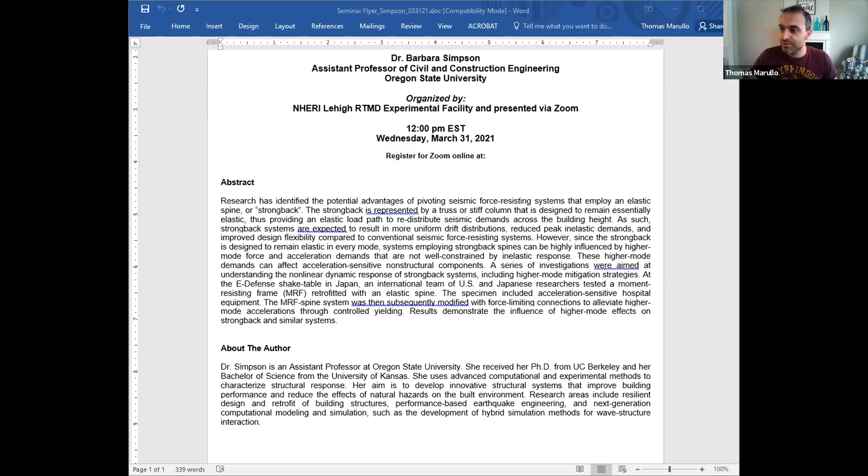Awesome, so thanks so much for the introduction. I'm going to be talking about a system that's rather near and dear to my heart, I've been working on it for quite some time. Today we're going to chat about higher mode force demands in systems employing elastic strongback spines. I tend to default to calling these systems with a strongback, but they're known by a number of different names depending on who you talk to. There's a lot of other researchers also looking into this topic.

But just to give a walkthrough—oh my, it is not moving, okay, I guess I have to click—to give a roadmap of what this presentation is going to go over: we're going to introduce this problem of story mechanism behavior in terms of brace frame systems, but this is an issue you see in a number of other systems as well, as we'll see throughout this presentation. Then we'll look at a possible solution, which is where this strongback concept comes in. I'm going to switch between calling it a strongback and calling it a spine, depending on which project I'm introducing.

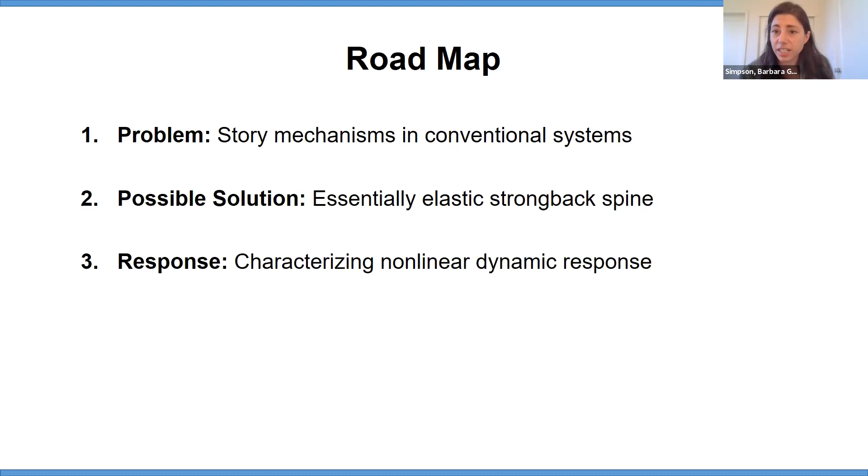Like I said, there's a lot of different research that's been looking into this topic. Then we'll go into characterizing the nonlinear and dynamic response of these systems, particularly in terms of higher mode effects. We'll talk about some ongoing research and applications of the system outside of how it was originally developed.

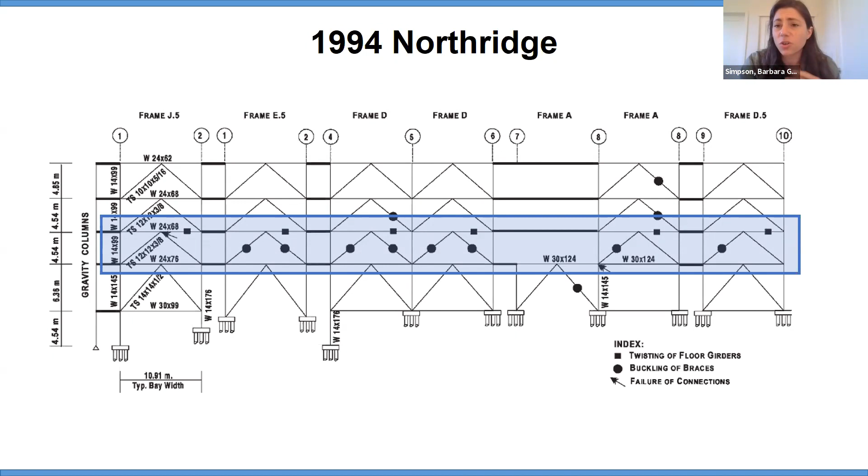And so let's look at this first part, this problem of story mechanism behavior. This is a building with observed damage after the 1994 Northridge earthquake, a very conventional brace frame system. All these dots represent some sort of inelastic response, in this case brace buckling mostly, as well as some connection failures. What you see is that almost all of these dots are concentrated in the second story. This is pretty indicative of what we're going to call story mechanism behavior, where you're utilizing the energy dissipation capacity of one story, but not leveraging the energy dissipation in all these other stories of this 5-story building.

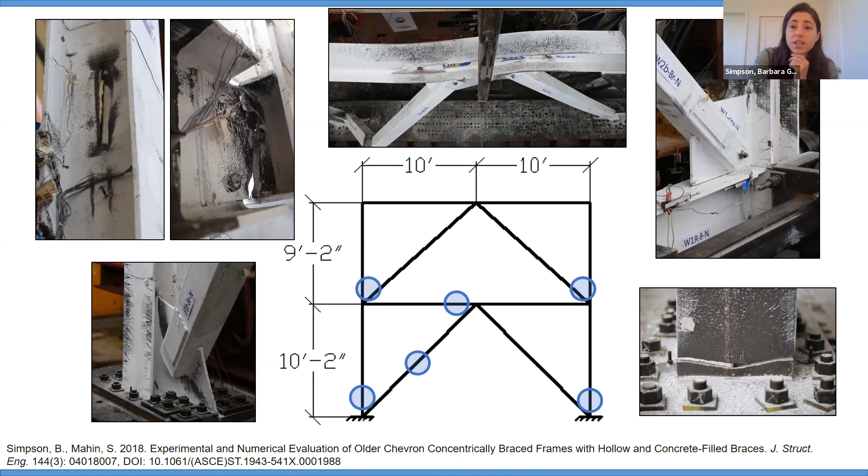This was the first test that we did, a 2-story conventional brace frame test. We saw a number of different damage states and types of deficiencies. But something I want to point out is that when we did this test, most of the damage was concentrated in the first story, fairly indicative of a first story mechanism.

In fact, we did two vintage brace frame tests. If the first specimen formed a weak first story, the second specimen, which was almost identical except we filled all the braces with concrete, gave us a weak beam mechanism where again almost all the damage was concentrated in the first story. This was the story mechanism behavior that was really the precursor to a lot of the work I'm going to present today.

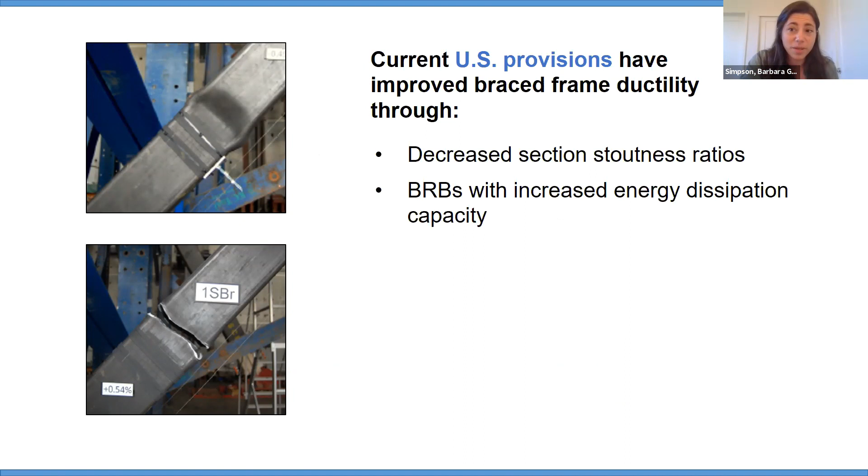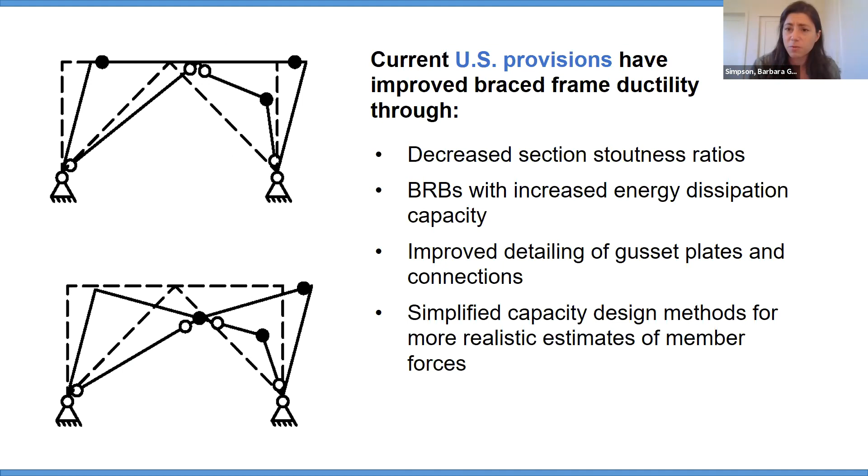If we take a step forward from vintage brace frame construction into modern US provisions for the seismic design of brace frames, we've done a lot. There's decreased section stoutness ratios to delay or prevent severe local buckling and fracture. We've introduced buckling restrained braces, which have more stable energy dissipation capacity compared to braces that buckle. We've improved the detailing of gusset plates to allow braces to buckle out of plane. We've also developed simplified capacity design procedures for more realistic estimates of member forces due to brace buckling and yielding. And yet there's still this issue that brace frames, as well as other modern systems, despite these improvements, still tend to form story mechanisms where damage is concentrated in one or a few stories.

That's where this possible solution comes in, this idea of an elastic strongback spine, which was really the brainchild of my advisor, Dr. Stephen Mahin, who actually passed away during the course of this research when I was doing my PhD. But he, as well as others, had recognized that there were a number of different ways we could mitigate this story mechanism behavior and mobilize the full energy dissipation capacity of the entire system.

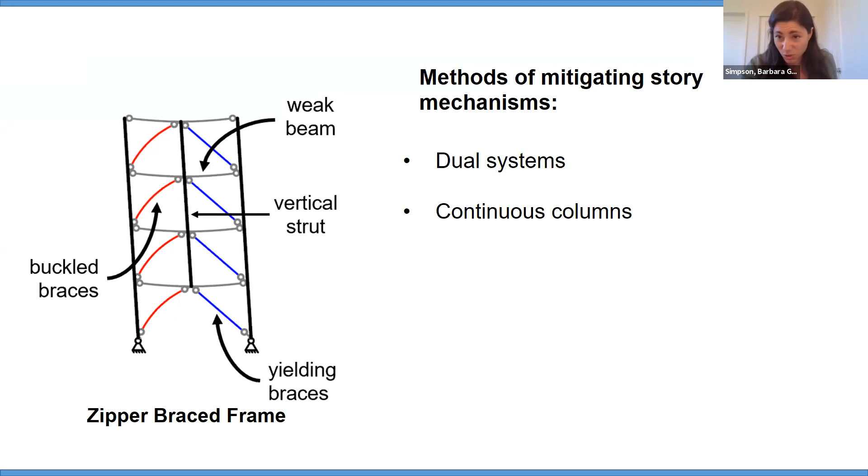If you look in the literature, there are a number of different ways people have approached this problem. There's dual systems, where you use a secondary system to apply some elastic restoring capability. There's the continuous column concept, where a continuous column spanning the height of a building, either some gravity system or something different, can span over the story mechanism problem. You could also think of steel plate or concrete shear walls as a stiff, elastic vertical element that imposes a more uniform drift distribution, thereby delaying these story mechanisms, along with rocking and self-centering systems.

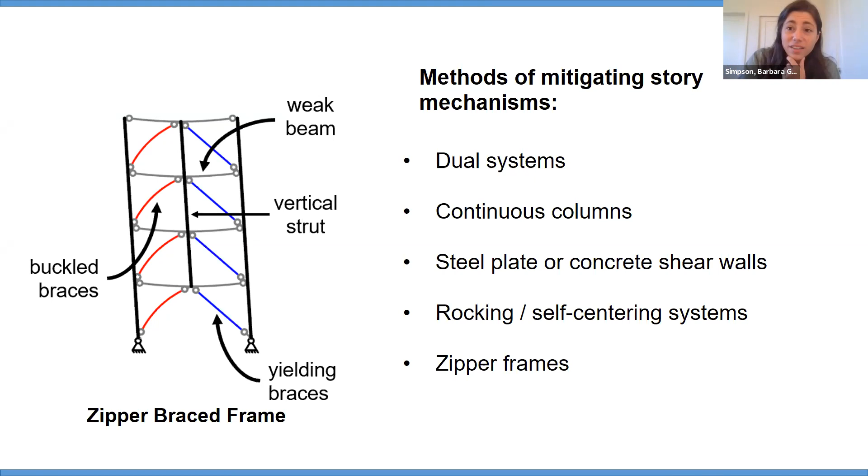The one on the right shows a precursor to what I've been calling the Strongback brace frame, but it's sort of a zipper frame, which leverages the idea of a weak beam and a vertical tie strut. As the braces yield and buckle, it pulls down on this vertical tie to engage adjacent stories. So those are different ways that researchers have approached this story mechanism problem.

It's useful when introducing the Strongback system to think about why story mechanisms form. So let's take a brace frame, and let's say each brace in every story has an equal strength or compression capacity C and an equal stiffness. These are the same braces used throughout the story, and it's subjected to some sort of seismic or inertial loading, let's say in this case an inverted triangular distribution.

When the braces in a story buckle, you get a loss of both strength and stiffness in that story. Unless there's an appropriate mechanism to distribute these demands from the columns, those demands tend to concentrate in a single story and potentially lead to a story mechanism behavior. That's the reason why these story mechanisms are so prevalent in these brace frame structures.

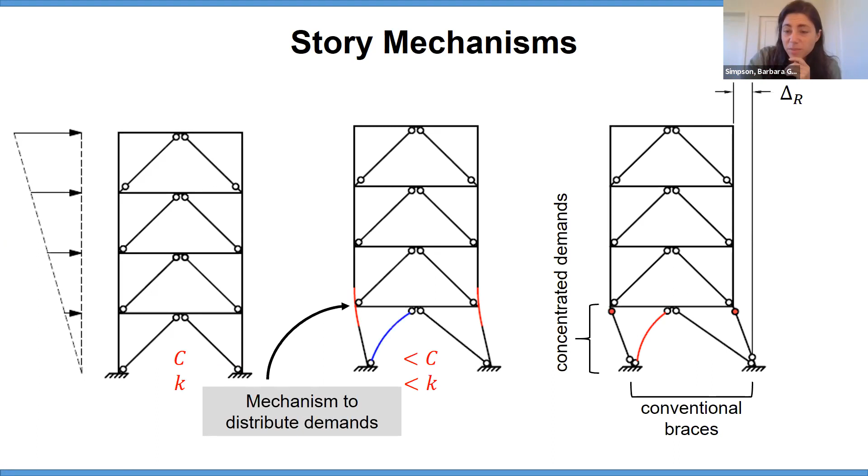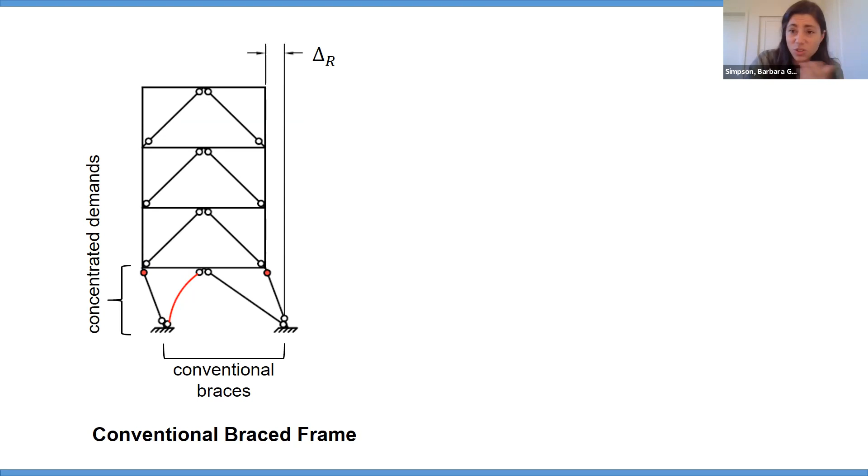This concept of a conventional brace frame has a tendency to form a story mechanism due to brace buckling behavior. The Strongback system introduces an essentially elastic mechanism that provides an elastic load path to distribute demands. This gray box area is a portion of the brace frame system that we design to remain essentially elastic, and it's able to distribute the demands across multiple stories.

So instead of, as shown in the figure on the left, 100% of the damage concentrated in one story, we utilize this elastic mechanism to distribute the demand across all 4 stories. Now you're getting a quarter of the damage distributed across this 4-story building. That's the concept of the Strongback brace frame.

Outside of that elastic Strongback, you design and detail the elements to yield and dissipate the seismic input energy. In this case, how the Strongback brace frame has been traditionally formulated is that you have primary fuses, which could either be yielding or brace buckling behavior, that serve as the primary energy dissipation mechanism. You also could have secondary fuses, for example flexural yielding in these longer beam lengths, that provide some secondary energy dissipation.

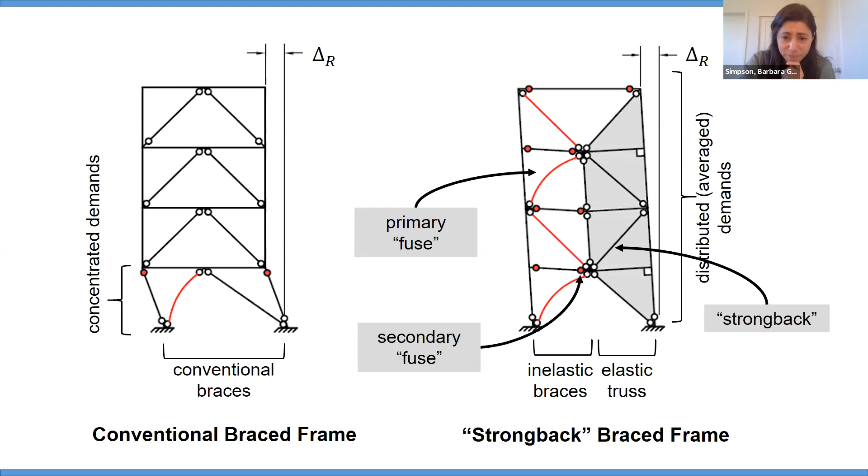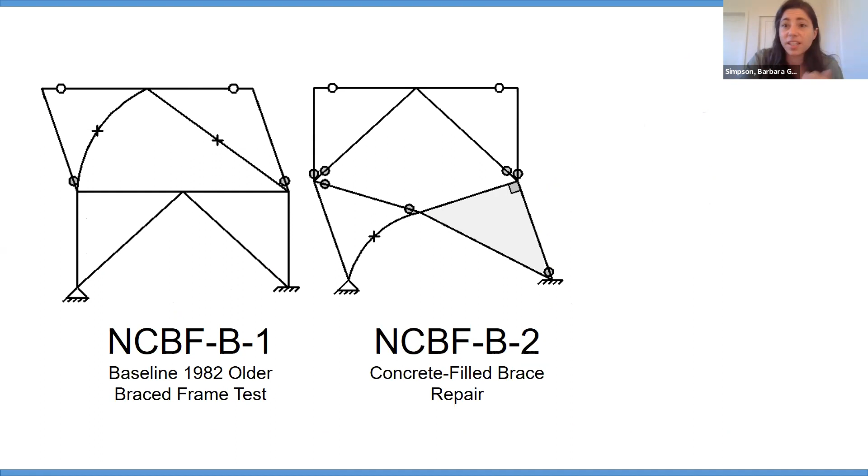Going back to this original research into these vintage brace frames, we had a first test that formed a second story mechanism, a second test that formed a first story mechanism, and then the idea of this third test as part of this research was to introduce the Strongback concept to distribute the demands over both stories. This gray triangle here is what we're envisioning as the Strongback retrofit scheme.

How the Strongback works, if we look at it in terms of its kinematics: this gray box, the Strongback, is designed to remain elastic. Initially it was formulated as a pivoting type motion, where this gray box pivots back and forth, and then you have some primary energy dissipation.

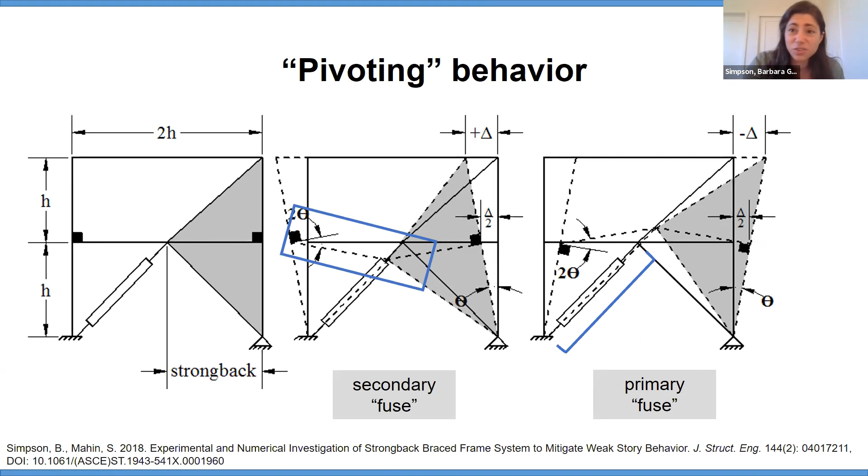In this experiment we were using a buckling restrained brace, a single buckling restrained brace. And because that pivoting motion induces a vertical deflection in the beam, you could also say there's a secondary fuse in terms of flexural yielding in this beam length.

We built and tested this at full scale. This figure on the right shows that pivoting motion, and you can see that we were successful in distributing the demands across both stories and achieving a more uniform drift distribution.

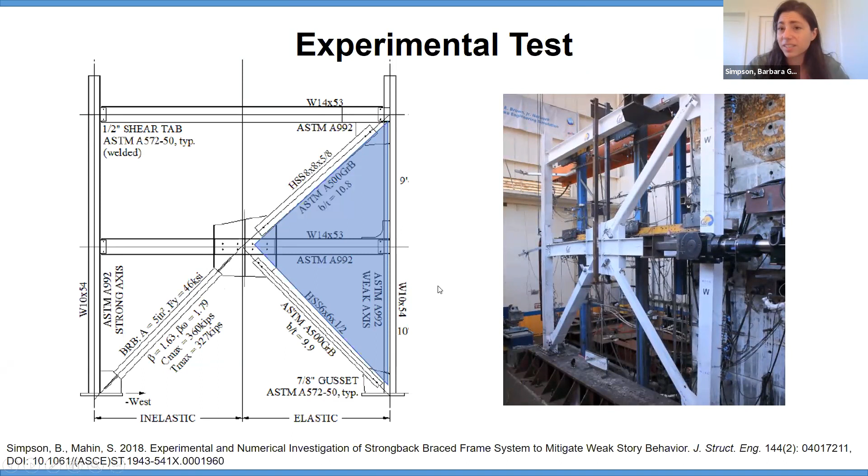So in that respect, this experiment was rather successful, and here we're seeing this Strongback, the elastic portion of this frame. This was a result of a number of different collaborations.

The vintage brace frame experiments were part of a much larger collaborative research program between Berkeley and the University of Washington. I happened to be the PhD student at Berkeley, and Andrew Sen was another PhD student at University of Washington. From this, there became interest in how we look at this system in terms of design development.

AISC also became interested in this project, and that leads into the second portion of the research: how do you characterize these force demands in the Strongback spine?

The reality is that the previous experimental test, although valuable in introducing the concept and showing that it was successful in distributing story drift demands more uniformly within the building, didn't actually look at the dynamic response. It was tested in a quasi-static way, with no inertial effects, etc.

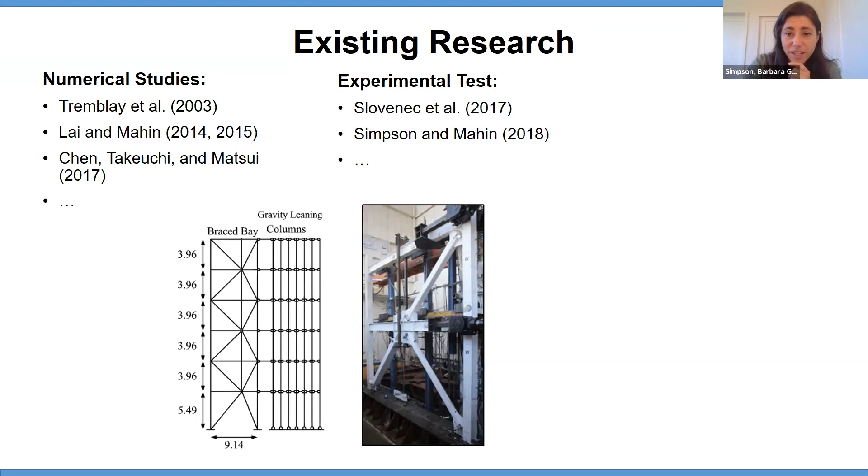There were some hybrid simulations conducted on a similar system, and then there was the experimental test I just introduced on this two-story Strongback system. Actually, at the same time, they were building and constructing very similar systems. This one's called the masted frame. You can see it looks very similar to many of the images I've shown so far.

By tipping structures in Berkeley, California. So we were having this sort of numerical analyses, experimental testing, and construction happening at the same time, but there were still large questions on how these systems behaved, not only in the inelastic range, but in terms of their dynamics. It turns out that when you look at the response of these systems, they behave quite a bit differently compared to traditional conventional systems designed to be ductile and exhibit inelastic behavior in every mode.

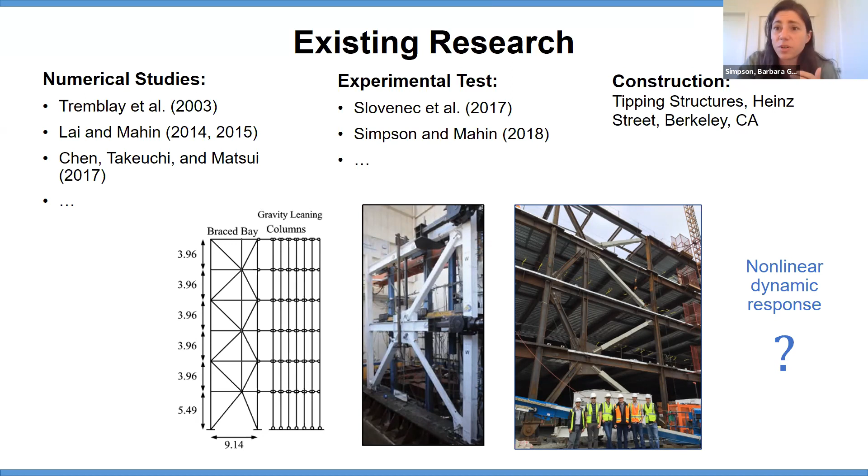So this was a major question for us, and I like to describe this in these sort of figures. I didn't develop these figures myself - they're from a seismic design course taught at UC Berkeley by Steve Mahin. I've leveraged some of these images in presenting this idea, but this is not a new concept of looking at force demands in the elastic components or the force controlled actions of a system.

Here, for example, we have a moment resisting frame where the plastic mechanism is typically flexural yielding at the ends of the beams, as well as potentially at the column bases. Here we have this moment frame subjected to an inverted triangular distribution. If we're interested in the moments in the columns, well, we know the flexural strength of these beams, so we can get the column moments.

However, during an earthquake, if those applied forces change, then the moments in the columns also will change. And as the inertial forces change again, those column moments also change again. So the elastic regions really may not be that well constrained by flexural yielding or the formation of these plastic hinges. What you could potentially do is run a number of different nonlinear dynamic analyses for a number of different ground motions, collect them statistically, get their median values, and then design for some statistical level of confidence for the moment in the columns to design them to remain elastic.

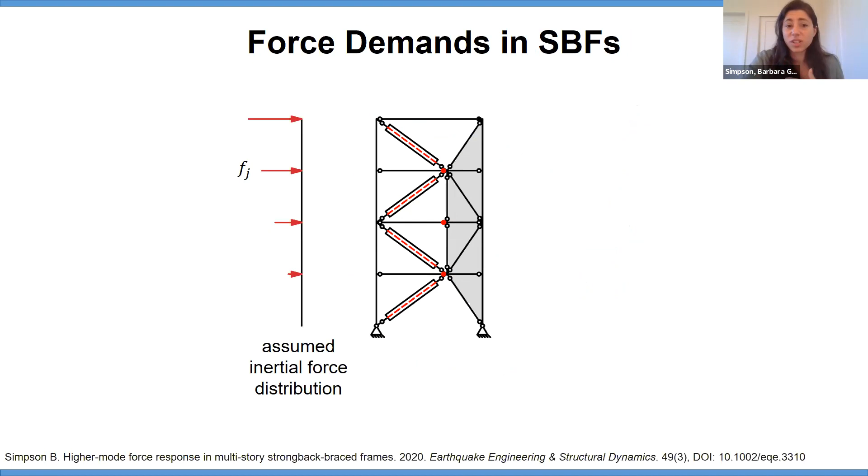So that's the example of force demands in a conventional system that we very much know. The same idea can be extended to this Strongback system. If you take this Strongback system, you can apply some assumed inertial force distribution. That's going to result in some sort of story shear demand. And then if we just do a section cut through this Strongback brace frame, what you'll see is...

The forces in this Strongback brace, denoted by PSJ, will be some combination of whatever the inertial forces are applying in terms of story shear and whatever forces are in the opposite brace - I call these typically nonlinear braces, the brace that's considered to be yielding in this case. So the force in the Strongback brace is coming from a combination of story shears developing during ground shaking from the inertial forces, as well as whatever axial force demand is being developed in the opposite brace.

Keeping that in mind, as that applied force distribution changes, the story shears will consequently also change. Even if that brace force is at its expected yield strength, if it's a BRB, the forces in the Strongback brace in this case will also change. And if those forces change again, those story shears would change again, and the forces in the Strongback brace change again.

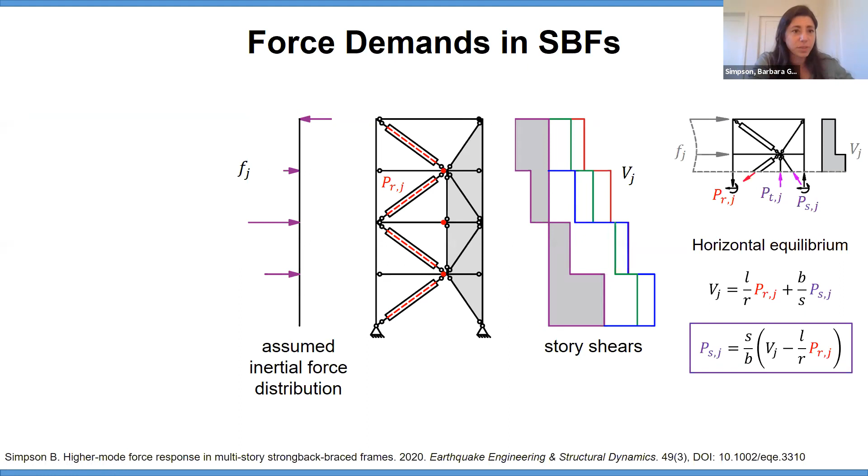What you end up seeing is that the force demands that are most significant, or could be most significant, in the Strongback portion of this system are actually ones that correspond to a force distribution where there's a reversal in the force. Here, there's a reversal of the force at the top story or top floor level, which is typical of, say, a second mode distribution. So you tend to see that the higher modes actually play a very dominant role in the forces in the Strongback.

Now, there's a number of different ways we can explain this. I prefer to take this approach from the concrete shear wall.

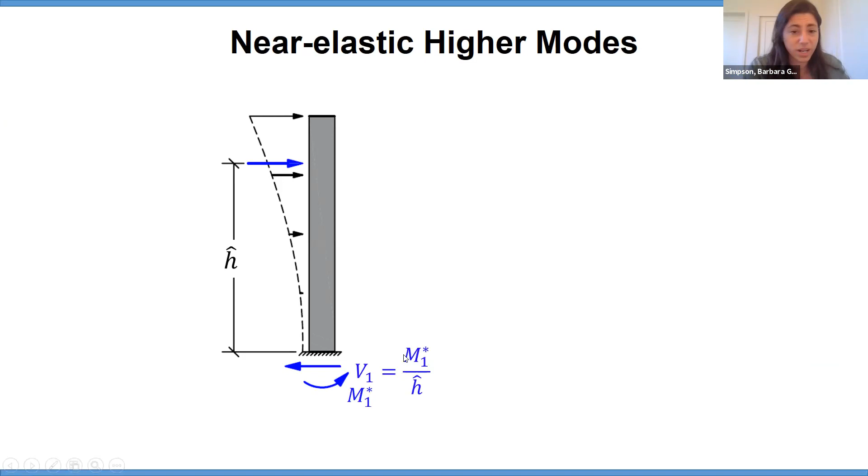So if we take a concrete shear wall that has some first mode-like inertial force distribution, and we have it form a plastic hinge about the base of the wall, with the remainder of the wall remaining elastic, the moments at the base of the wall are constrained by the strength of that flexural hinging at the base. The base shear would then be whatever that moment at the base of the wall is, divided by the height from the base to that force resultant.

Now, what you happen to see is that if that inertial force distribution changes, say due to contributions from the second or higher modes, then that force resultant will shift downward, because the second mode in particular tends to be associated with force reversal. Even if that moment at the base of the wall remains the same, because we're still getting flexural hinging at the base, that height to the force resultant becomes smaller, which means the base shear can become larger.

So even though the moments in this system at the base of the wall are well constrained by flexural yielding, the base shear, and even the story shears, are not so well constrained. Even the moments above the base are also not so well constrained. That's the same principle at work in the Strongback system.

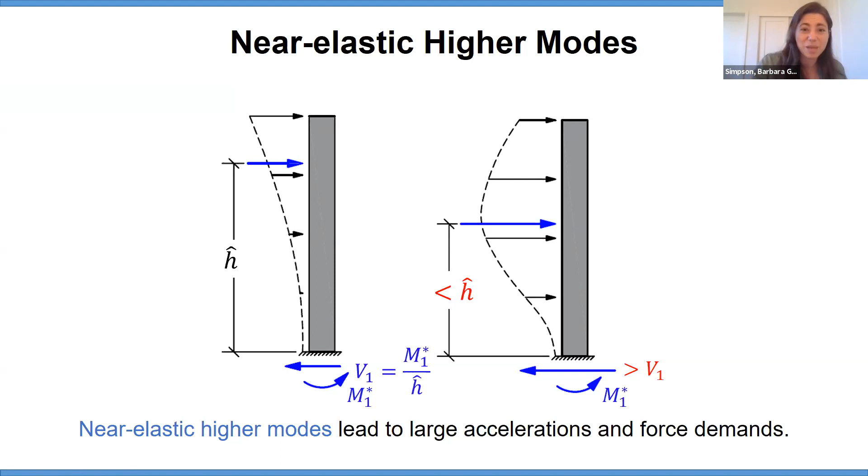In the first mode, you're getting limited forces due to the yielding mechanism. I introduced these previously as primary yielding in the braces, or secondary yielding in the beams. Those limit the forces in the first mode. However, that nonlinear mechanism is not necessarily limiting the forces in the second and higher modes.

So what you can see is, as you make this Strongback more and more stiff, you get this averaging of drift demands with story height. That tendency for a story mechanism to form, or for the system to concentrate damage and demands in a single story, will be reduced, and you'll get a more uniform drift distribution.

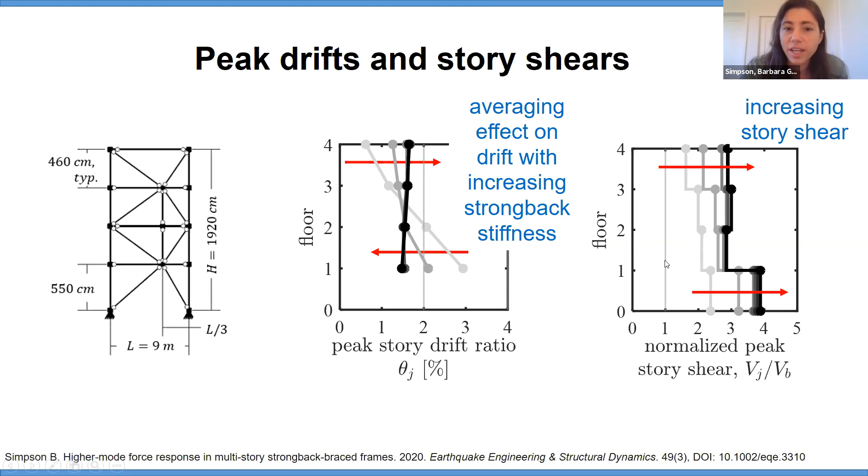But what you'll also get is increasing story shear and acceleration demands due to the presence of these higher modes. Those arise because the Strongback is designed to remain elastic in every mode, which is different from conventional systems where we expect inelastic response in all modes. So as that Strongback becomes stiffer, the story shear demands will also increase.

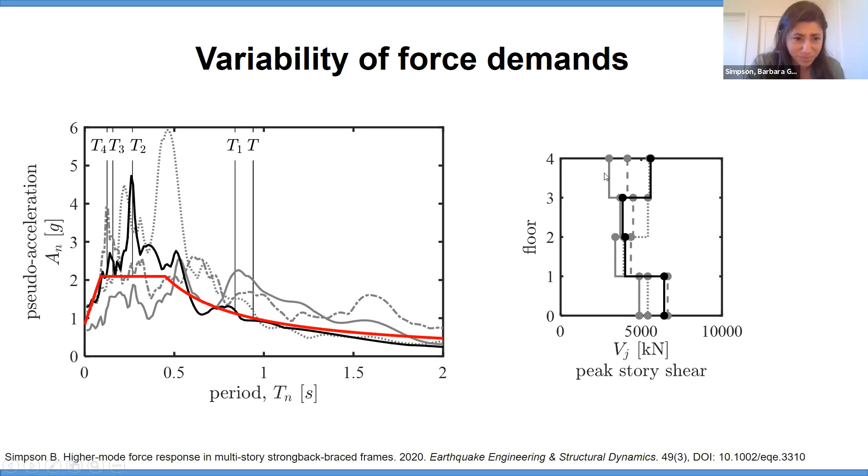They have fairly small pseudo accelerations or spectral accelerations at the higher mode periods of the Strongback system, so you're not seeing as much of this higher mode story shear response. However, if your ground motion happens to have very large spectral accelerations at the higher mode periods, those are going to stay in the elastic range and contribute more to the story shear and acceleration response. So there's a dependency of the force demands related to the characteristics of the ground motion and how it interacts with those higher modes.

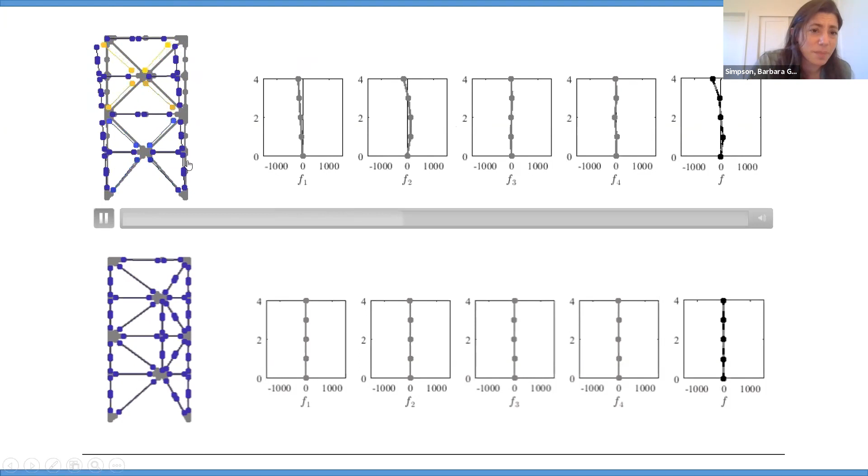Here's another example of a BRBF system, buckling restrained brace system, where the inertial forces are decomposed into the first mode, second mode, third mode, fourth mode, and the total response. This compares what you get with the conventional system versus these Strongback elastic spine systems. You'll see that the BRBs yield, giving primarily a first mode response, and the forces in the second and higher modes are still limited by the system's ability to form story mechanisms in those higher modes, so you're not getting large higher mode response in the system. It's primarily operating in that first mode response.

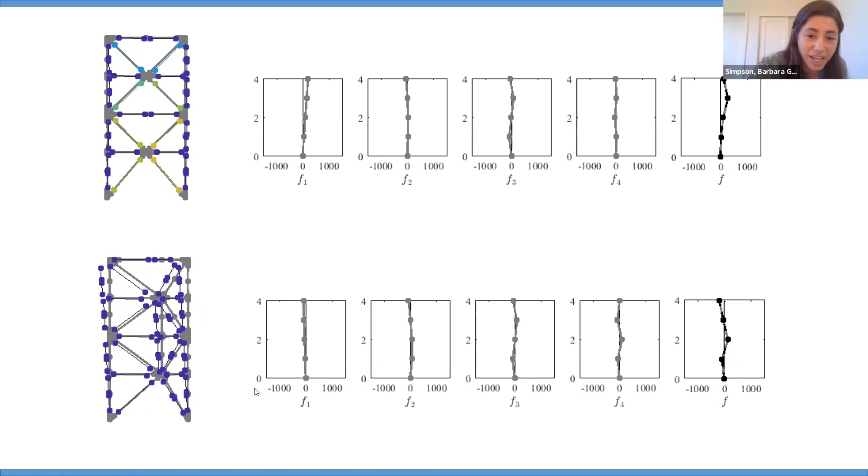What you end up seeing with the Strongback system in this figure on the bottom is that the BRBs, these nonlinear braces, these primary energy dissipaters, tend to yield under what looks like a first mode force distribution. But if you look at when the Strongback is really activated, shown by these colors, it's really when that second mode force distribution becomes dominant. If we replay this, you're seeing that Strongback light up, the force demands in that Strongback spine light up, really when you're getting very large second mode force contributions.

This is summarizing that: in the Strongback system, the BRBs are primarily engaged under that first mode type force distribution, but the Strongback, because it's elastic, is picking up very large second mode force distributions that it needs to be designed for in order to remain elastic in that second mode. So the inelastic portions of the system are subjected to that first mode pivoting response, but the Strongback needs to be designed for everything else, meaning it needs to remain elastic under the second and higher modes.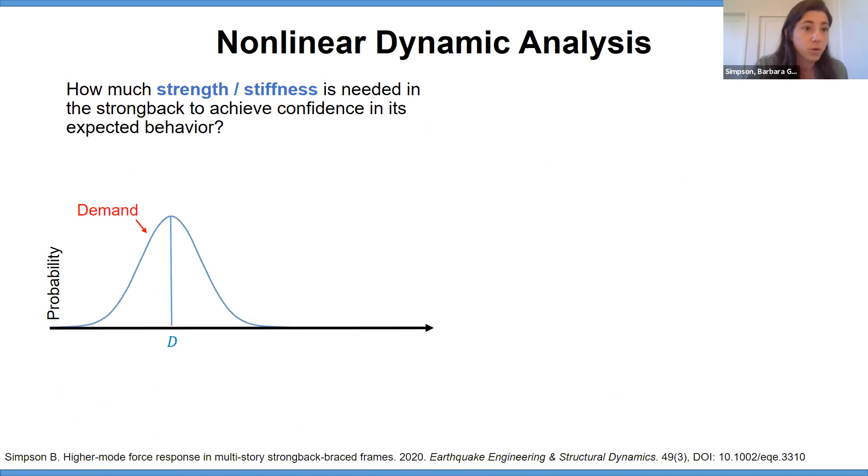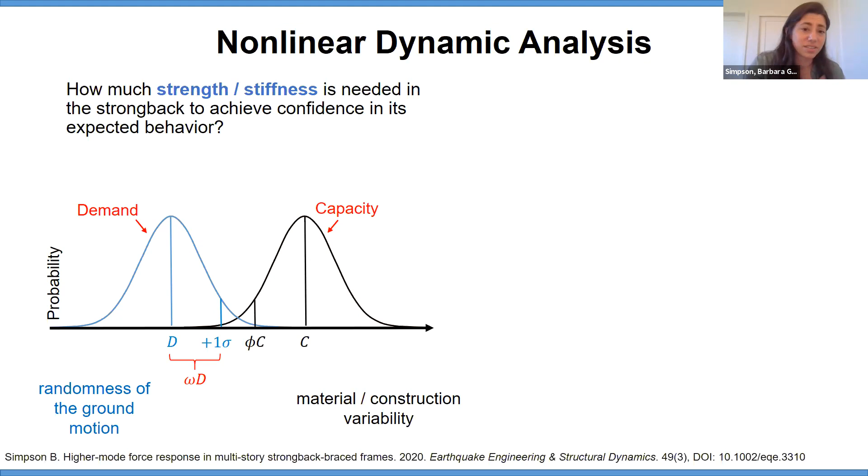So there are a number of different ways we can approach this problem, thinking about how to design the Strongback to have enough strength and stiffness. One way to incorporate these higher mode effects is through nonlinear dynamic analysis. You could run a number of different ground motion records, which will result in different force demands on the Strongback spine. Then, due to record variability, you take the median plus one standard deviation or some statistical confidence of that demand, and compare it to some capacity in the Strongback elements, accounting for material variability, construction quality, etc.

This allows us to make sure that demand is less than capacity, including variability in the ground motion record and associated force demands, as well as capacity in the Strongback braces. Then you could say we're just going to minimize the probability of having any inelastic response at some hazard level. That's one way to approach this problem. The issue is that a lot of the intuition can be lost in summary statistics, and this isn't necessarily a practice relevant to every design office. So there's been a lot of work looking at how to approach this in terms of static analysis, so you don't have to do an entire nonlinear dynamic analysis.

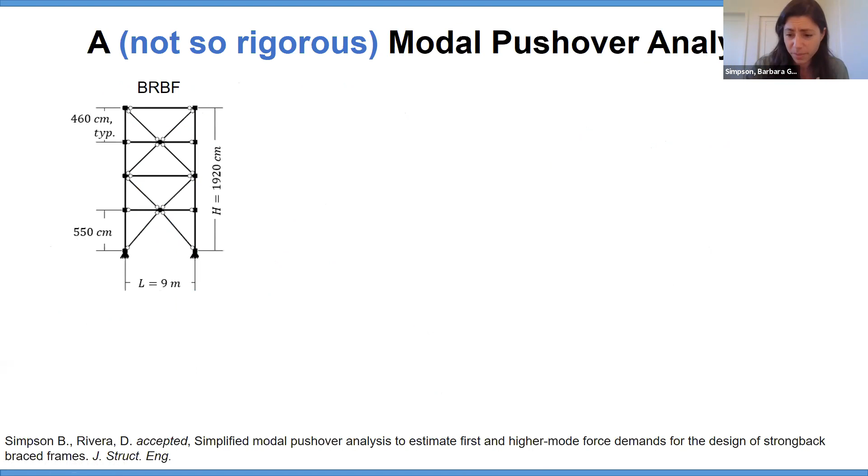Here's an example of a not-so-rigorous modal pushover analysis approach that describes the difference between BRBF behavior and Strongback behavior, to gain some intuition of the response. So you can imagine a typical BRBF.

If you do a pushover analysis in the first mode, then all the BRBs are going to yield. And you can see with this base shear versus roof drift ratio plot on the right, the forces after the BRBs yielded are limited.

And if you were to take that same BRBF and subject it to second mode response with a force reversal at the roof, what you'd see again is that the resistance of this system is primarily dependent on the BRBs, so those BRBs will yield again, and the base shear versus roof drift ratio response is again limited in the second mode. So this is that typical BRBF behavior.

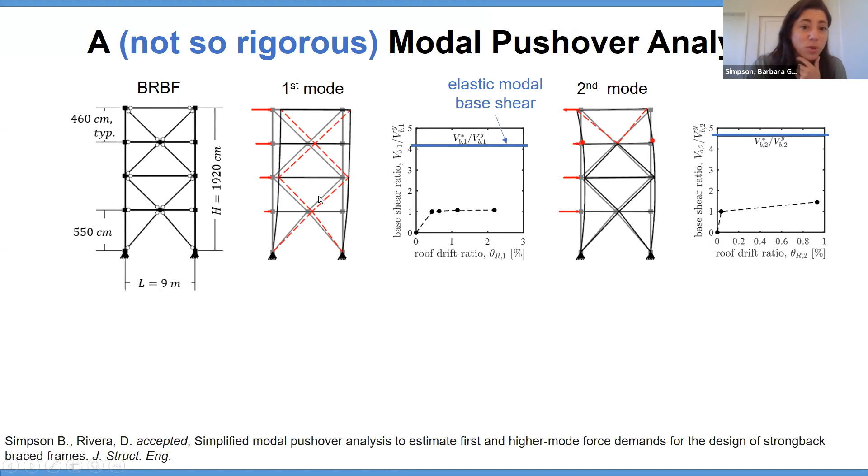If you look at the modal base shear in the first and second mode, if that system were to remain elastic, you'd see that the strength in both the first and second mode of a traditional BRBF system is significantly less than the elastic level base shear. So for this typical BRBF system, you have limited strength, or very small higher mode contributions in the second and higher modes.

But with the Strongback system, you'll see that same sort of response in the first mode—this pivoting-like first mode behavior. So you subject the Strongback to this first mode pivoting type response, and with the BRBs yielding and secondary flexural yielding in the beams, you still get a base shear response that's below the elastic base shear level. So the forces in that first mode are still limited by your nonlinear mechanism.

In the second mode, things get a bit more interesting. You can still get yielding in the BRBs in this case, but because of the presence of the Strongback, which is designed to remain elastic, you actually have very significant strength in what I'll call higher mode bending.

If you look at the base shear from the ground motion—say you take that ground motion, look at an elastic response spectrum, and say this is the base shear required for the system to remain elastic, that's this horizontal blue line here—you'd see that this system actually has significantly more strength than that blue line. So you need to design that Strongback to remain elastic above the elastic base shear level associated with whatever hazard you're looking at.

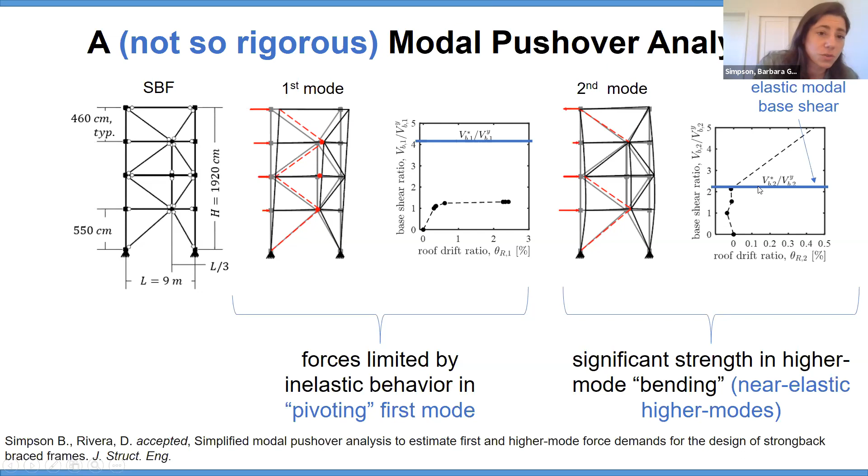One of the procedures that's been proposed: you can think about this first mode response as a plastic mechanism response, something that's yielded in the first mode where the forces are limited. So you can perform a pushover analysis or plastic analysis in that first mode. Then you can think about the second mode as this near-elastic or partial mechanism response, where there are additional force demands picked up through this higher mode bending.

You can think of other mode shapes—in this case a 4-story building, so 4 translational modes—as being near-elastic but with very small modal contributions. Here's the third mode and then the fourth mode, and then you can use modal pushover analysis to combine the response from each of these modes using some modal combination rule. In this case I'm showing SRSS, a superposition rule, where the higher mode contributions are superimposed upon this inelastic first mode.

I'd like to point out that there is a paper on this that has been accepted, but there are a number of theoretical inconsistencies with this sort of analysis approach.

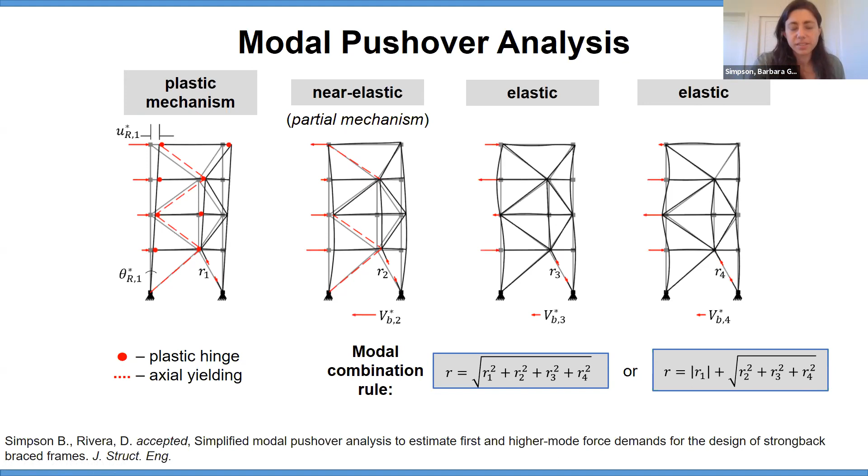For example, you're combining modal responses in the nonlinear range, which we know is not theoretically consistent. But what you'll end up seeing is that thinking about this inelastic first mode with a partial mechanism response in the second or even third mode, and then elastic response in the higher modes, actually gets you fairly close to what you end up seeing from the nonlinear dynamic analyses, despite its theoretical inconsistencies.

Another way of looking at this problem is through a modified response spectrum analysis. A number of different researchers have proposed methods for looking at other types of similar elastic systems, like concrete shear walls or rocking brace frames, in terms of a modal response spectrum analysis.

You can say that in the first mode, while you're achieving some inelastic response and limiting forces, maybe you can use an R=8 for a BRBF system in the first mode. But then in the second and higher modes, you see these near elastic higher mode force demands, so you could potentially use an R=1 in the higher modes. There's been a number of different analysis strategies where you modify the structural model to then do these analyses in the second and higher modes. I've just listed the work down below.

That brings me to this third part. I've introduced this idea of near elastic higher mode demands that are significantly different from what we think of with conventional seismic force resisting systems that yield in every mode, or form a mechanism in every mode, or can just form a story mechanism. What you see in the Strongback system is these very large higher mode demands that can be associated with an elastic response.

So when we start looking at applications and implementations, instead of describing the Strongback as inducing a pivoting type response with a more uniform drift distribution, I started thinking about the Strongback as more compensating for anything other than this pivoting first mode response.

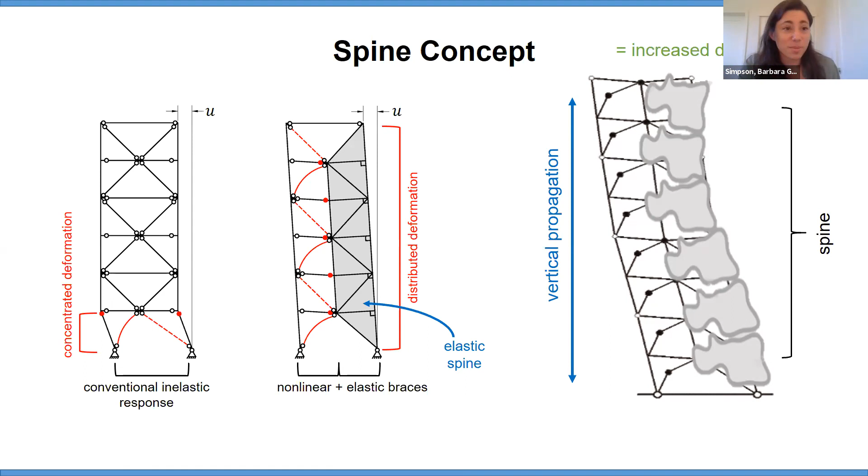So you can think of this Strongback more as a spine that propagates demands through bending in the higher modes, thereby providing some increased design flexibility. Rather than thinking of the Strongback as just this singular brace frame system, there was an effort to start extending it to other types of systems.

For example, in a concrete shear wall, you can have a wall that's pinned at its base that responds in much the same way, with much the same design premise, as a Strongback system. You can think of an uplifting rocking brace frame, which again has this very stiff elastic component, but uplifts about its base. So the overturning moment is controlled by this rocking mechanism, much like this pin base in the wall on the left.

Which is all related to this pivoting Strongback brace frame that you see on the right, where we have this gray box representing the Strongback, the elastic portion of the system, that then pivots back and forth about the pin base. So you can start saying that these near elastic higher mode demands are actually very similar across all of these systems, and that each of these actually belong to a family of, say, elastic spines.

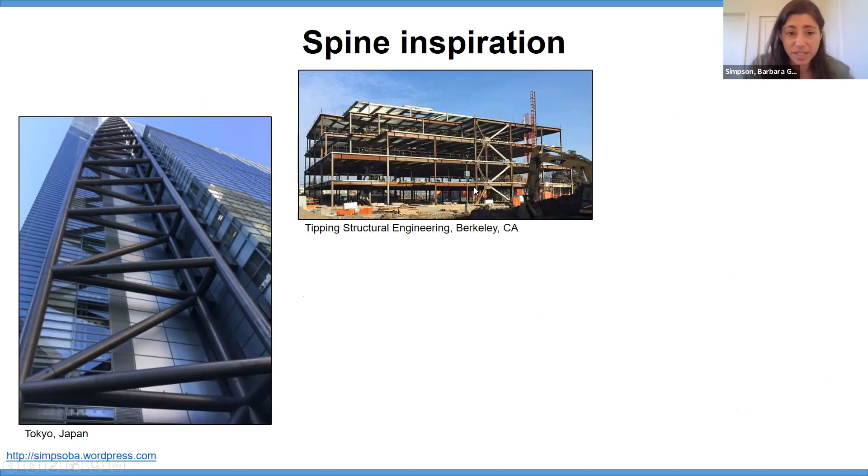There's a number of different examples of spine inspiration in practice. This is actually just a photo I took on my very ancient iPhone when I was in Japan a few years ago, where you could take an elastic exterior spinal system and think about it in terms of a tall building. I already mentioned the mast or Strongback concept that was implemented by Tipping in Berkeley. And then there's also the Tesla Gigafactory done by Gregory Luth and Associates with Exponent, in Reno, Nevada.

Something I like to point out with this last one is that they all have this ability to constrain moment about the base. So you're talking about a stiff elastic system that's pinned about the base of the Strongback or spine. It's not intended to provide supplemental lateral strength, it's more to engage the building more uniformly over the full building height.

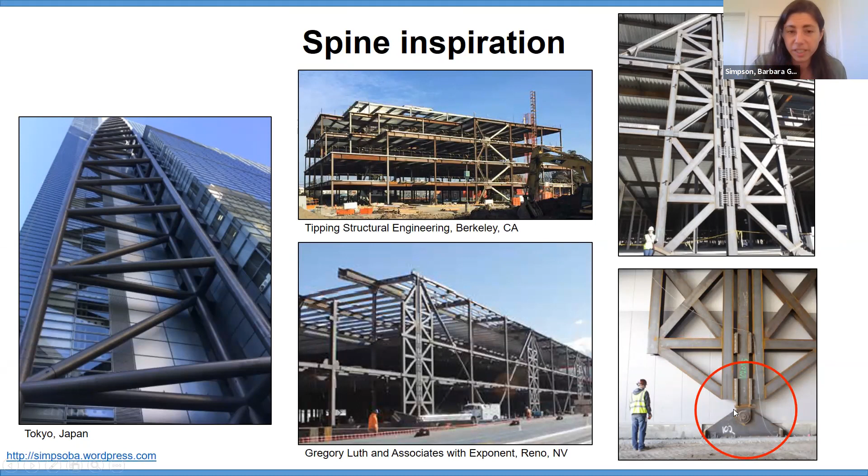There's been a number of these ideas of pinned base spines, for example, as a concrete shear wall.

And we can see this sort of connection at the base, this sort of very nice concrete machined pin. And then you can have some sort of shear yielding elements and then provide the energy dissipation. So these are all sort of in the family of these elastic spine systems.

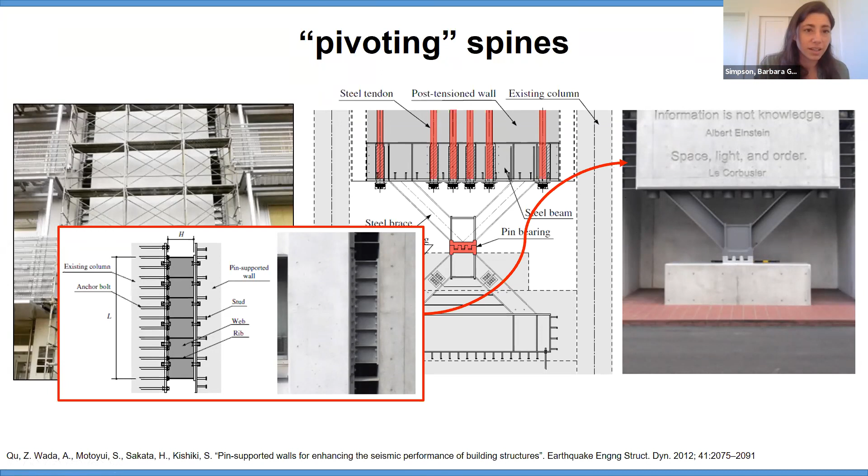And so that's where this new project comes in, and this is a collaborative project called the Frame Spine System with Force Limiting Connections. That's a collaborative project between Lehigh. I'm now at Oregon State University, and then the lead PI, Larry Fahnestock, is at University of Illinois. And then there's a number of Japanese collaborators that are also collaborating on this project.

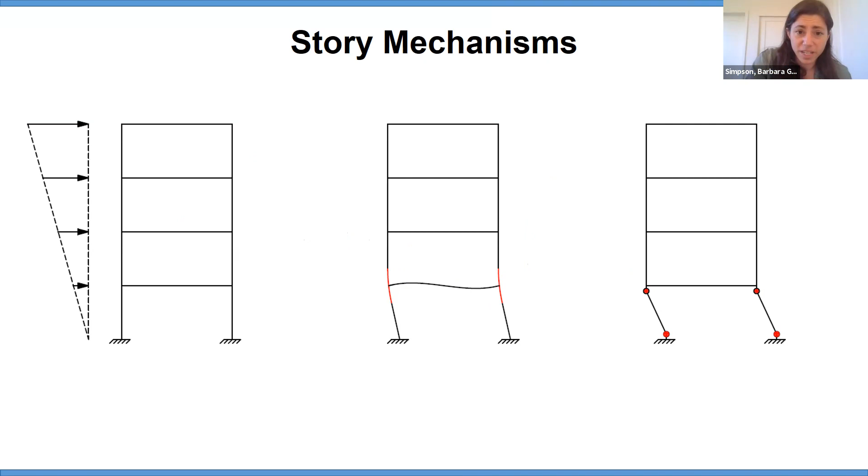And so we can sort of extend that idea of the Strongback system, which was initially developed for brace frames, into the concept of delaying or preventing a story mechanism response in a moment frame. And the same concepts still apply. You still need a mechanism to distribute demands. And often we think about that in terms of the strong column, weak beam design requirement to sort of limit concentrated demands in one or a single story.

And so you can imagine taking that moment resisting frame, we can now introduce an elastic vertical element to distribute those demands, which again is this sort of spine concept, that it's pinned at its base. It provides an elastic load path to distribute demands uniformly, and then is also designed to remain essentially elastic. And so you have this spine that can distribute demands more uniformly with building height, but then you also still have this higher mode effects that tend to come into play.

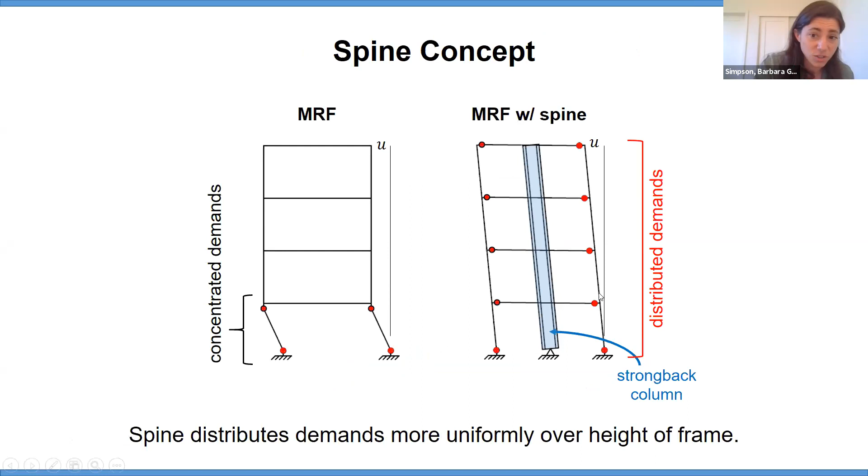And I'm just going to show the same slide that I showed previously. And so you have the effects of the higher modes that are not well constrained by the nonlinear mechanism. So even though you have yielding, in this case, in the base MRF due to flexural yielding at the end of the beam, you still have these higher mode effects that are not well constrained by that base MRF yield mechanism, that side-sway mechanism.

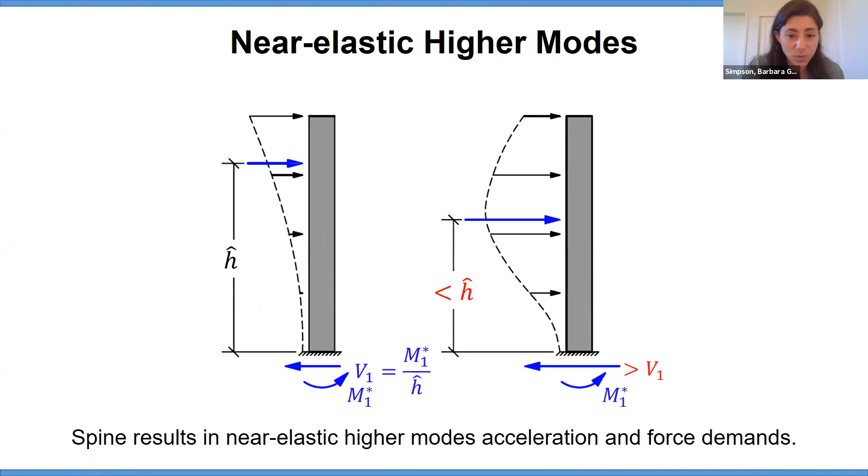And so to mitigate these sort of higher mode demands, a lot of work was done at Lehigh to develop a force limiting connection. And a force limiting connection is a yielded connection that's sandwiched between, in this case, the base moment resisting frame, but it's really any conventional system, and then an elastic strongback spine.

And so you use this yielding component that limits the transfer of force demands from the elastic spine to the base system, in this case an MRF. And because it limits that transfer of forces, it can then reduce the acceleration and the force demands that we're seeing from these very significant higher mode effects, these near elastic higher mode effects.

And then there were a number of other force limiting connections that were also developed by Lehigh. In this case, we can see a tongue FLC, which again is this sort of yielding mechanism between the spine and the MRF that's designed to reduce these acceleration and force demands.

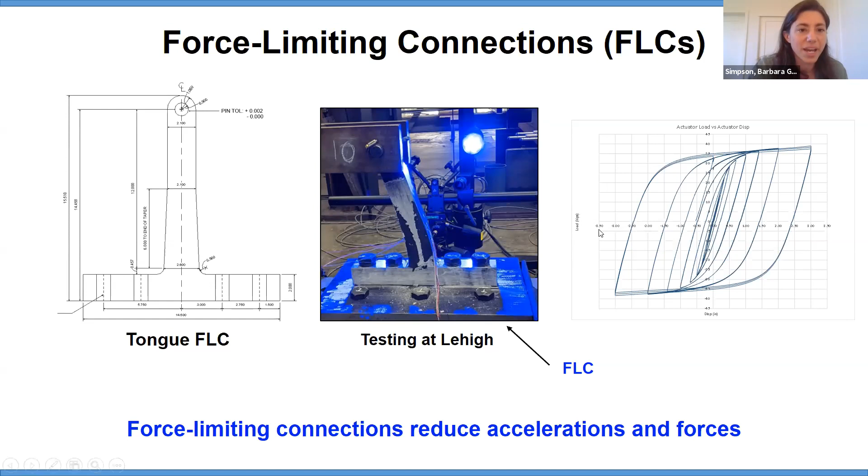And so now we can say, well, we can have a spine that's designed to remain elastic, to induce more uniform drifts, but we can also control our accelerations by having a yielding component between that spine, that strongback system, and the base frame. And so...

As part of this study, we sought to test this hybrid spine force limiting connection, or FLC, idea. And so we actually were able to leverage an existing shake table study being conducted by the Japanese at the E-Defense shake table. So the original study was testing a 4-story moment resisting frame that was connected through this walkway to a 3-story base isolated building.

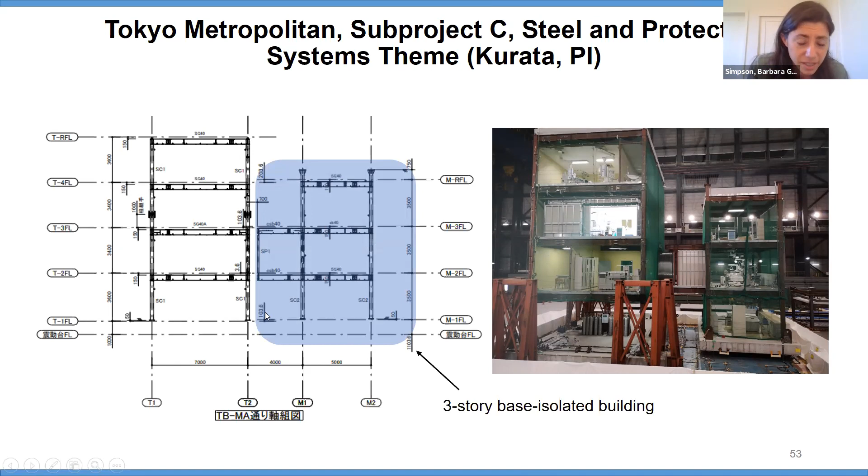And both structures had non-structural hospital equipment that were acceleration sensitive. So then we could look at the impact of having the higher mode accelerations. And so what we did in the study is we made use of this existing 3-story base isolated building, and we locked the isolators, and then we retrofitted it with our spine force limiting connection idea.

And so if this was the original 3-story building with base isolators, we added a 4th story to better look at these higher mode effects.

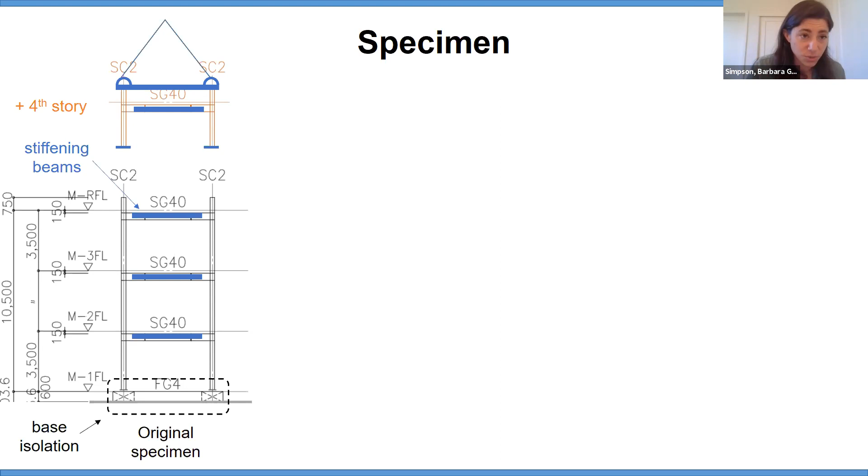We also added stiffening beams that allowed us to connect the spine to the MRF and distribute those demands a little bit better.

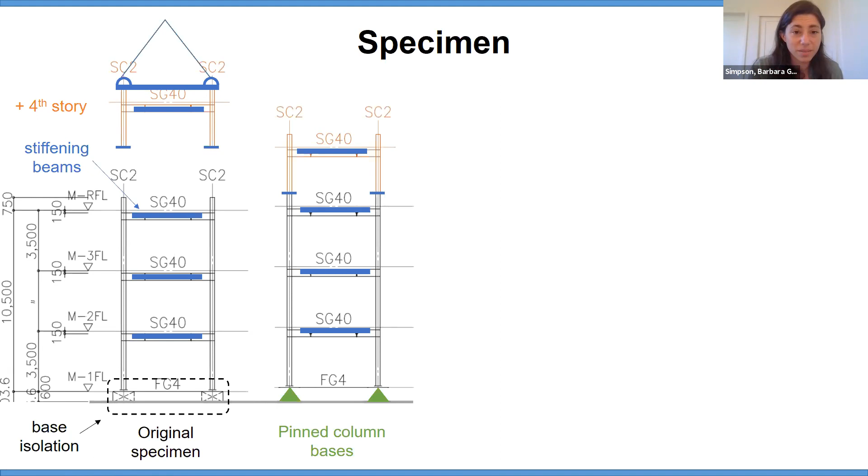We also pinned the column bases in the base MRF to really induce a severe story mechanism, because we wanted to look at a system with large higher mode effects and a severe story mechanism tendency. The higher mode effects are due to the inclusion of an elastic column in this case, the strongback spine that was connected at all 4 floor levels to the base MRF.

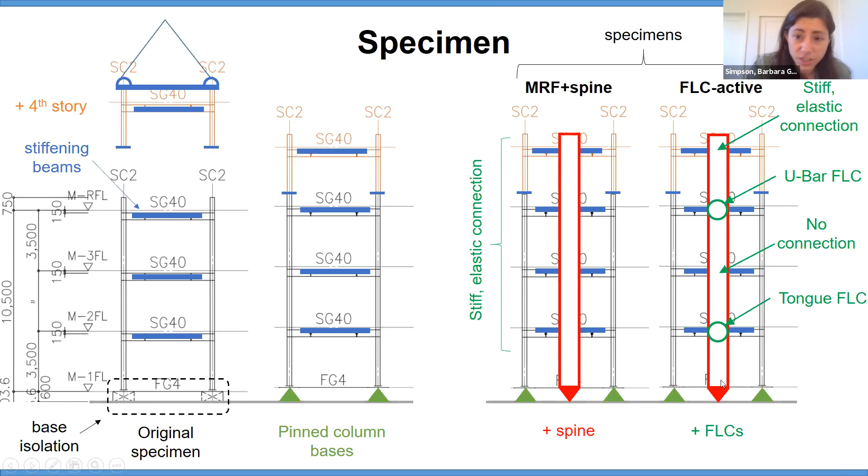That's going to induce the higher mode force demands. We're also going to add a second case where we have force limiting connections between the spine and the base MRF, using those U-bar FLCs developed by Nippon and the tongue FLCs developed at Lehigh. Between these two specimens, there's the spine plus base MRF where the FLCs were locked and not engaged, which you can think of as a very stiff connection between the spine and the base moment resisting frame, and then the FLC active case, where we had deformable yielding connections to mitigate higher mode acceleration demands between the spine and the base MRF.

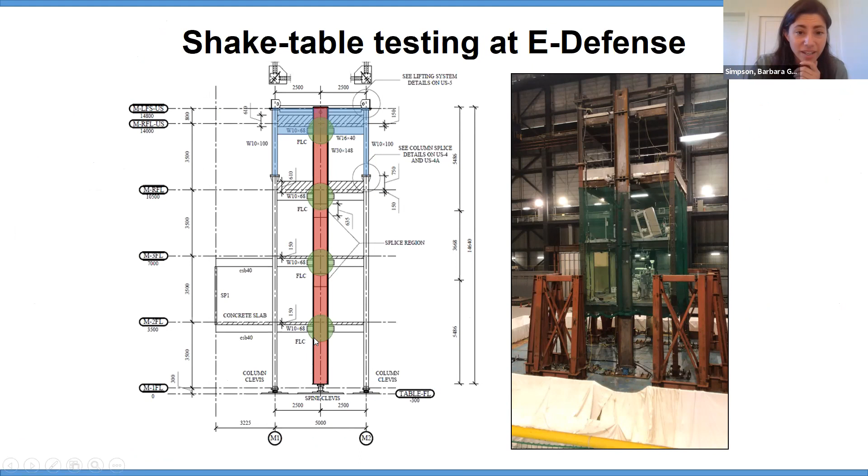This was the progression from concept to actual testing, an experiment that we completed in December of last year. You can see the spine, the stiff, strong, elastic strongback spine, with the potential FLC locations and the additional fourth story.

In preparation for this testing, we looked at a number of different ground motions. This is a suite of over 80 ground motions for a 10% probability of exceedance in 50 years hazard level, for a site in Oakland, California, consistent with the original moment resisting frame.

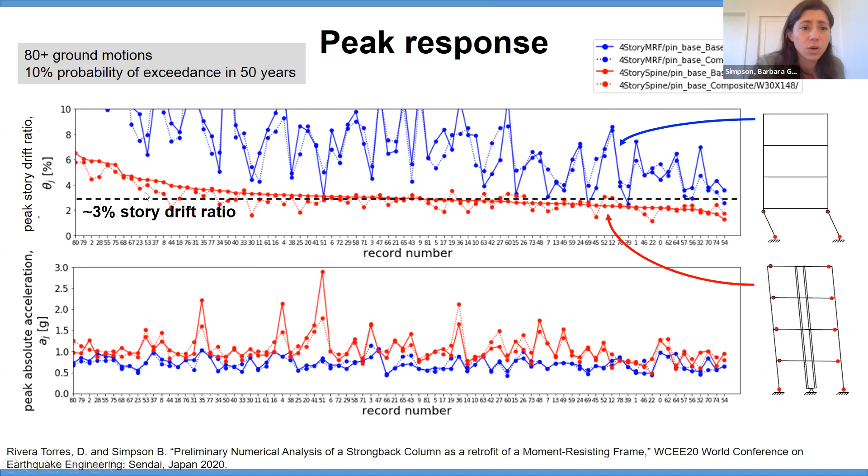We selected a ground motion to achieve not huge story drifts, because we wanted to be safe during the shake table testing, so a story drift ratio less than 3%. We were also very interested in accelerations associated with non-structural damage, because these structures originally had hospital equipment, so we wanted to induce rather large higher mode acceleration demands, around 2G.

We ended up selecting ground motion 48, which corresponded to a Northridge ground motion record that gave us reasonable drifts, so we were pretty safe, but also so we could observe these very large higher mode contributions coming from the fact that we've implemented this spine.

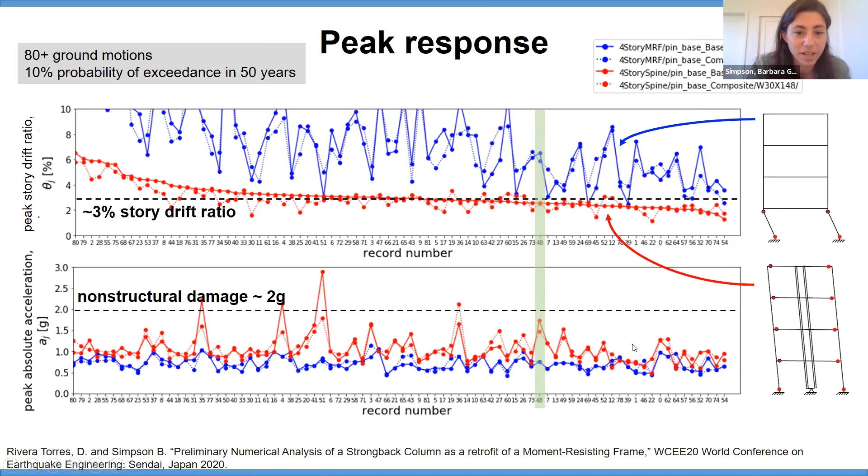Notice that this blue line is associated with the base MRF, which has a severe story mechanism tendency, and that story mechanism is limiting the acceleration response. But when you add the spine, you can really pick up those higher mode accelerations, as seen in these red plots on the bottom plot here. So we selected that first ground motion to look at this higher mode response.

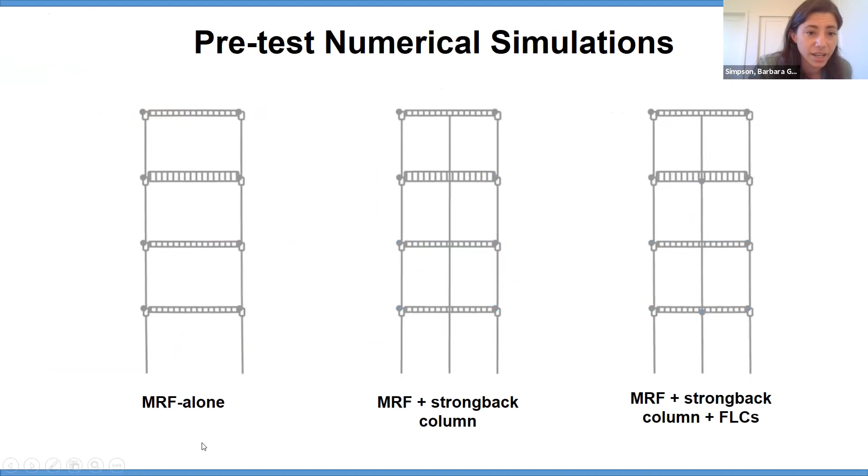This is an example of the pre-test numerical simulations of the MRF by itself, the MRF with the addition of the Strongback column, and then the MRF with the Strongback and these force limiting connections. With the MRF alone, you get a really severe first story mechanism tendency, shown in this figure on the left. This is pretty much beyond the range of the numerical model at this point, but associated with collapse in the structural model.

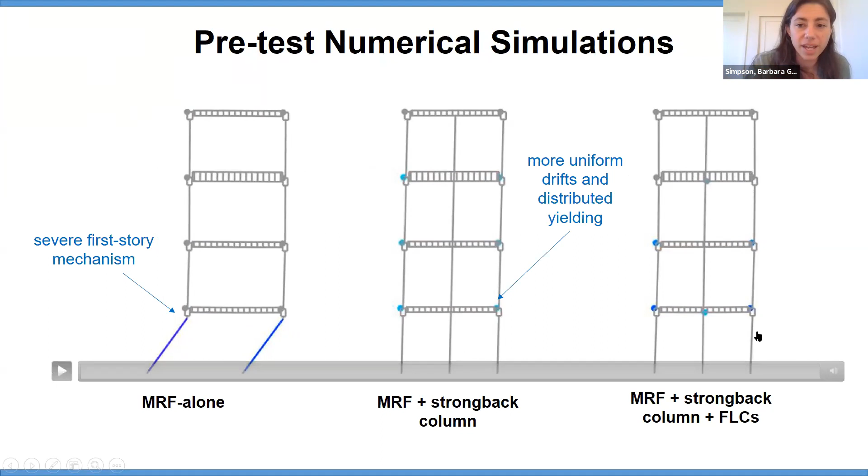With the spine, you get a much more uniform drift distribution across the building height. So the peak drift demands are decreased, but you're also seeing damage occurring in every story. You see something similar here, still a uniform drift distribution, slightly larger peak drift demands, but also yielding at these FLC locations, which allows us to mitigate some of the higher mode acceleration effects that can affect sensitive non-structural components.

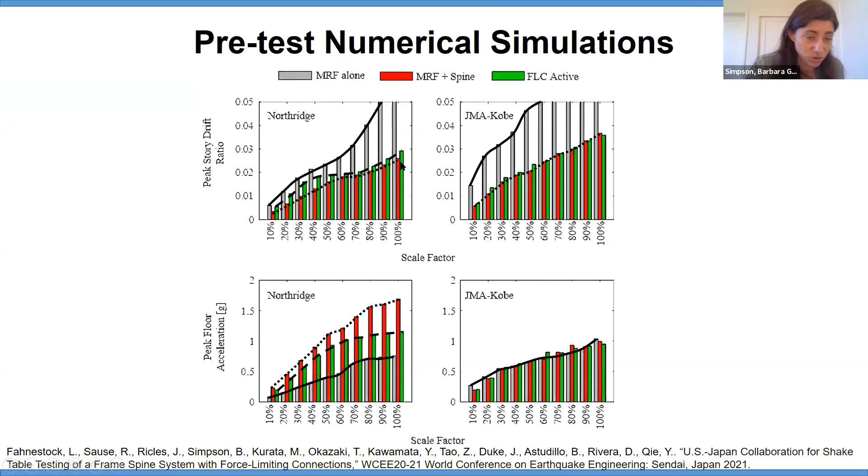When we look at the peak story drift ratio for the Northridge and JMA Kobe earthquakes, and compare the peak response for each of these scale factors, those ground motions were scaled from 10% to 100%. This black line shows the MRF, this dotted line shows the MRF with the spine system, and this other dashed line shows the contribution from the FLCs.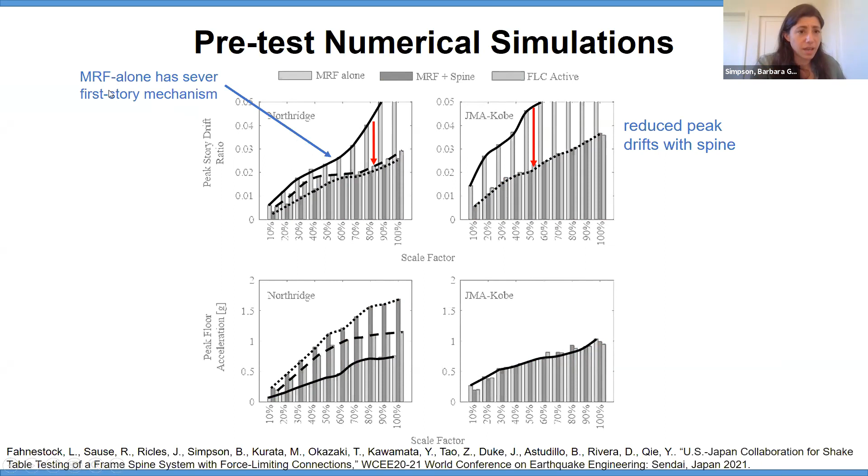Numerically, we see that severe first story mechanism in the MRF by itself. But when we add the spine, even with the FLCs—although the FLCs do result in somewhat larger drifts, but not the large drifts we saw for the MRF alone—you see a really vast reduction in that peak story drift demand. That's because of the presence of the spine, which distributes demands more uniformly.

When we add the FLCs in, that force limiting connection between the spine and the base MRF, you see that the higher mode accelerations are reduced compared to the spine by itself. But that's highly dependent on which ground motion we're looking at. For the Northridge record, there's a definite decrease in higher mode accelerations—that record has a lot of spectral content at the second mode period—but you're not seeing that in the JMA Kobe record, because it tends to have much smaller intensities near that second mode period. So that decrease in accelerations really does depend on the ground motion input.

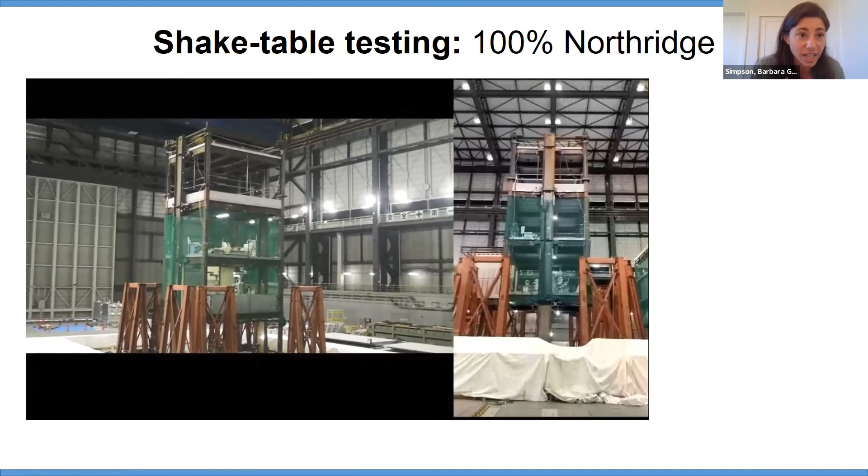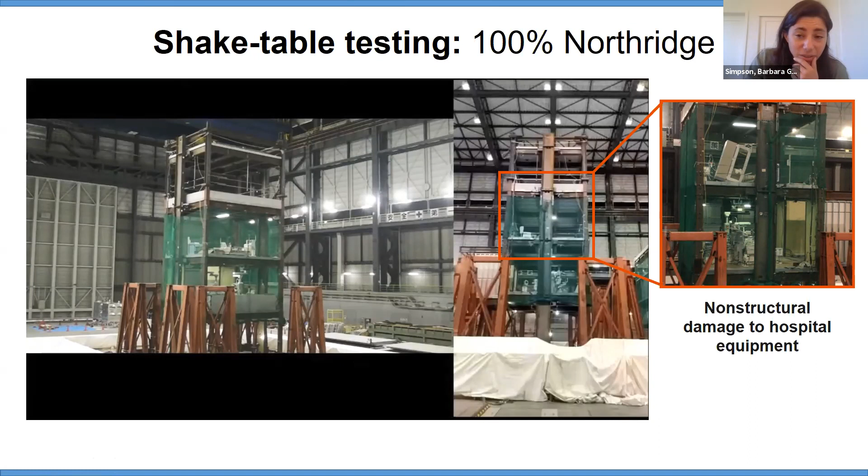This is just the test from last December. This is 100% Northridge. The FLCs are not active in this case, and you can see the non-structural components. We got fairly large acceleration demands with the spine directly connected to the MRF, without that yielding force limiting connection. You can see here that there was some toppling of some of the equipment, which could be really disastrous for some of these hospital buildings. Nonstructural damage to hospital equipment is shown here.

This is still an ongoing study funded by the National Science Foundation. It's very collaborative between the US institutions as well as the Japanese researchers. I just really want to say a heartfelt thank you to all the graduate students in this project who were really instrumental in moving this project forward.

So that's an example of one application. Another one we've been working on is extending the spine concept, or the Strongback concept, from steel and concrete shear walls to also mass timber. The nice thing about mass timber is that, because it's a relatively new material with a number of sustainability benefits, it's really uniquely positioned to foster innovation. What we're seeing in the mass timber world is a lot of push toward more performance-based design concepts, next generation enhanced performance systems.

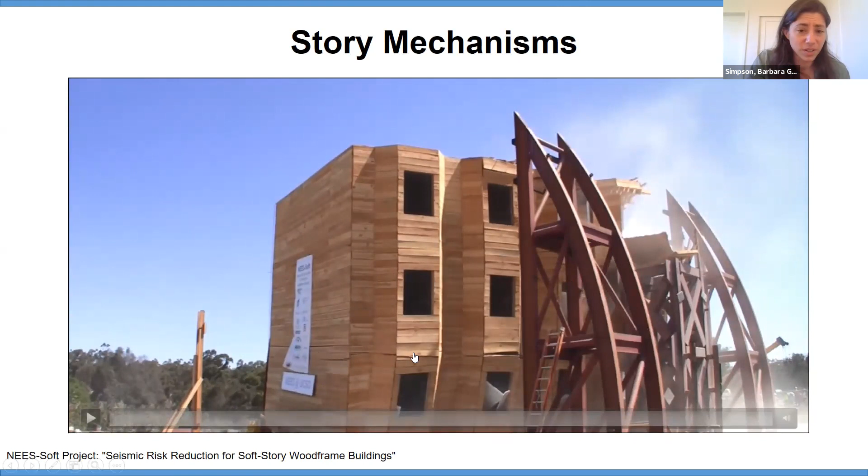So these ideas of spines, of an elastic component to distribute drift demands more uniformly with building height, have caught on in this world. This is another example of a story mechanism. I introduced this starting with steel systems, but this is a problem we see in a number of other types of lateral force resisting systems, regardless of material. This is maybe a little dramatic, but these soft story problems are not just problematic in steel brace frames.

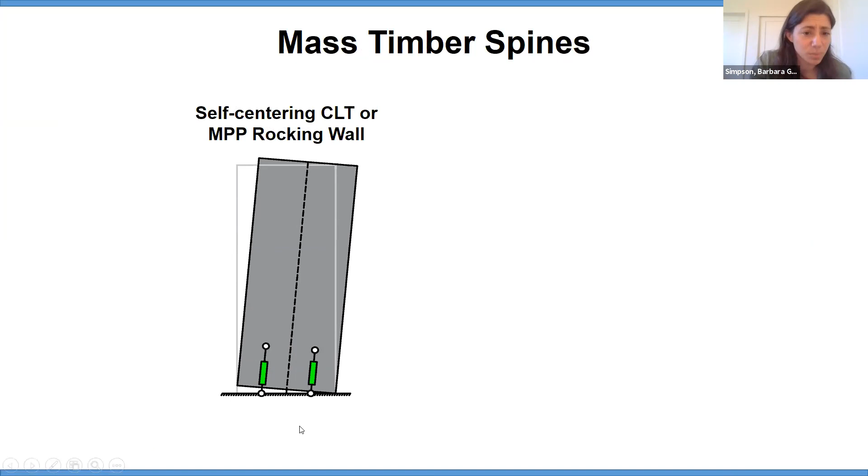We can also see their influence in mass timber systems or wood systems. So you can imagine a mass timber spine. Here on the left is a self-centering, either a cross-laminated timber or MPP rocking wall, something that uplifts about its base, where the remainder of that spine is designed to remain elastic. Then you can have supplemental energy dissipation provided by BRBs or some steel energy dissipator. Or you can have a pivoting CLT or MPP spine that's pinned at its base, that pivots back and forth about a pinned base connection, with some other steel energy dissipators in the system as well.

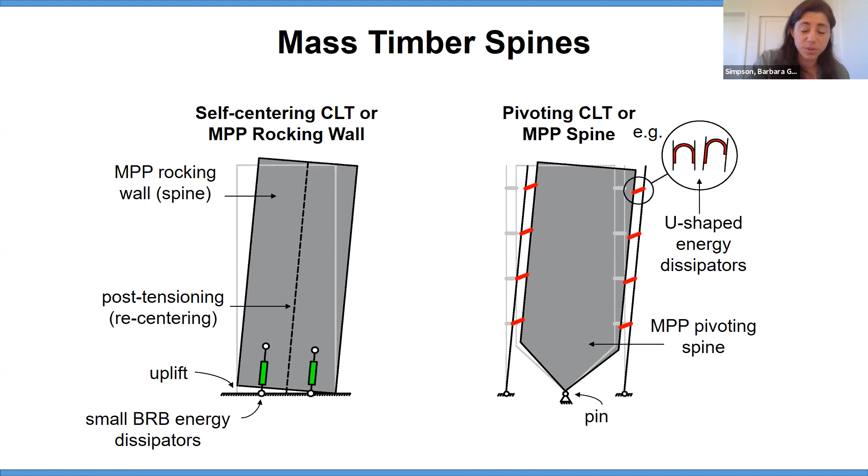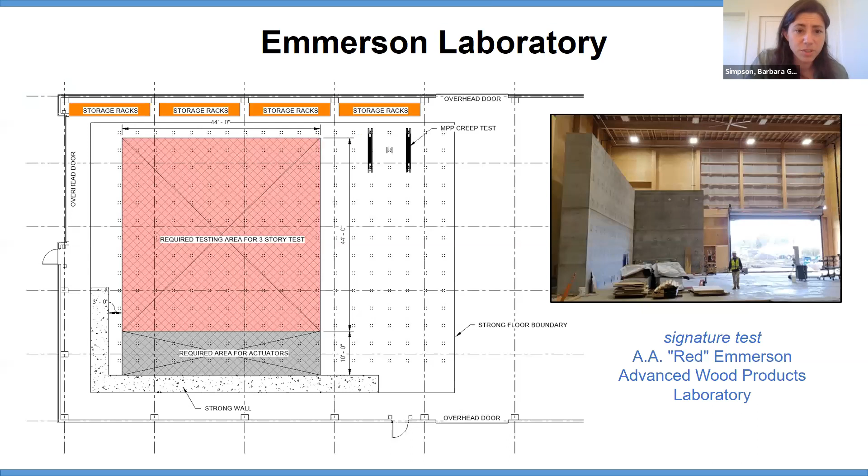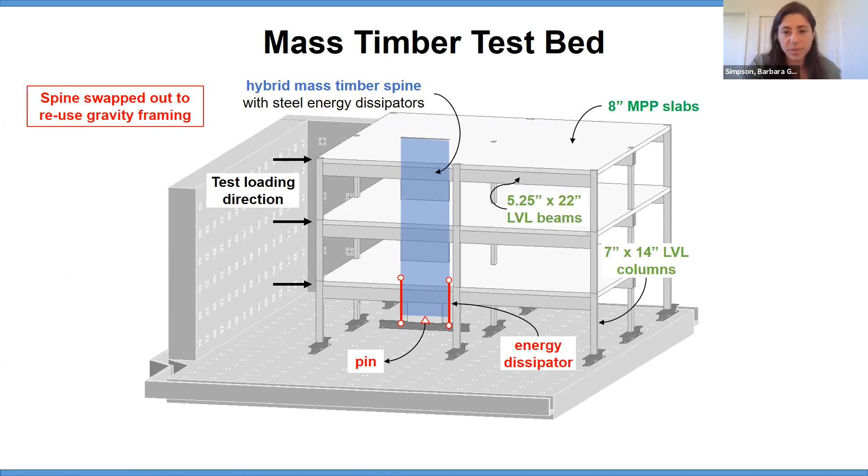Conceptually this is very similar to what we previously introduced in terms of the Strongback column coupled with a moment resisting frame, or the Strongback braced frame where you have a Strongback truss coupled with a conventional brace frame. This is a signature test we're looking at here at Oregon State. We have a brand new Red Emmerson Advanced Wood Products Laboratory, and in that lab we're planning on testing this 3-story mass timber system with a spine that's able to swap out from the gravity framing. It serves as a test bed where we will test a number of different hybrid mass timber spines with steel energy dissipators. Those tests are forthcoming.

We have a number of graduate researchers on this project, as well as a postdoc who have been really fantastic, and a number of partnerships and linkages with ongoing work with the National Science Foundation, as well as from the Tallwood Design Institute.

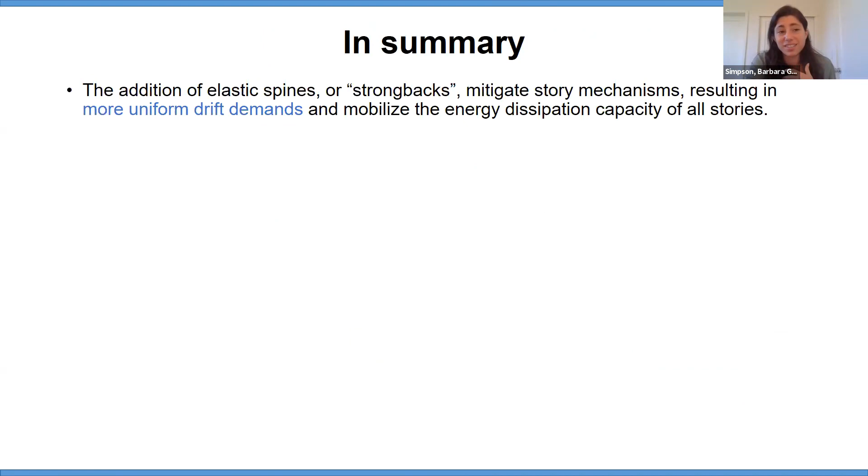In summary, the addition of these elastic spines, which are stiff vertical elements designed to remain elastic, can mitigate story mechanisms and result in a more uniform drift distribution. You also get to utilize the energy dissipation capacity at every story, at every floor level. But they also result in near elastic higher mode force and acceleration demands. If you're going to design the Strongback to remain elastic in every mode, you need to consider these very large force demands that will accumulate in the Strongback spine, and they're highly dependent on the ground motion input.

You can introduce a force limiting connection idea to mitigate these higher mode demands, some sort of controlled yielding mechanism that limits transfer of forces between your elastic spine and whatever base frame you're connecting it to. Provided you tune those FLCs appropriately, you could decrease these higher mode accelerations and still control drift response.